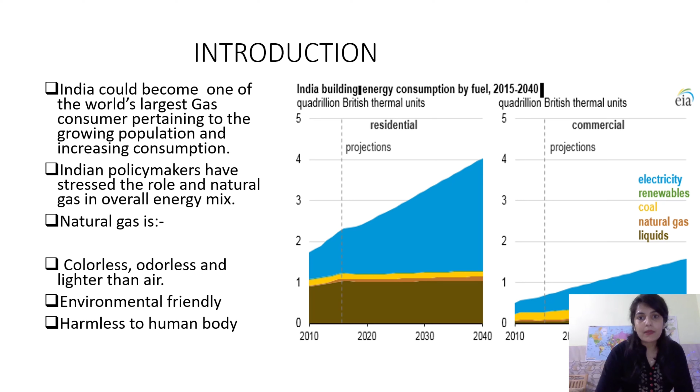As I already told you in the introduction, India is going to become one of the largest consumers of gas in coming time, due to its increasing population and increasing consumption. So India's policy makers are stressing on the role of natural gas in the overall energy mix. This pipeline is considered to be the most economical form of transportation, so that's why many pipeline projects are in the pipeline.

So let us calculate the demand. Let me use the marker first so that I can highlight. So the calculation of actual demand: how we'll calculate the demand is by calculating the domestic sector, the transportation sector, and the industrial requirement.

The area is Rishikesh, so we'll consider all the nearby areas like Rishikesh, Chamoli and Pauri Garhwal. The transportation sector will include buses, autos and cars, and any other requirement by the state government of Uttaranchal. So this is how I have done it.

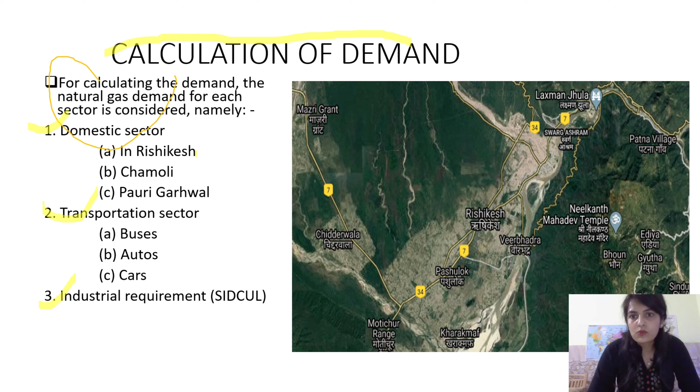So, procedure for calculating the demand: we'll take the population of Rishikesh city first, it is around 1,03,138. Population of Chamoli city is around 3,91,605, and Pauri Garhwal is around 6,87,000.

We will add all these populations and it will come around 11,81,000. Number of households, we are assuming an average 6-member family. Each house will use LPG, consuming 1.5 cylinders per month, that is in 2 months they will consume 3 LPG cylinders. This is the average requirement we have taken till now.

The standard weight of an LPG cylinder is around 14.2 kg, and I have written the calorific value of natural gas and LPG also, which will be used later in the calculations. So amount of LPG consumed in each household is 14.2 into 1.5.

That is in terms of LPG cylinders used right now, and if we are calculating for per day, we'll divide it by 30. So it is around 0.71 kg per day. This is LPG.

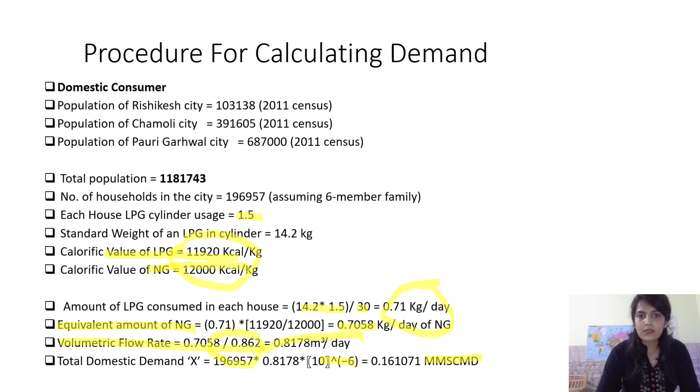Now, we have seen many calculations written in the form of MMSCMD, because there is a very large amount of natural gas which will be required in the whole region. So the calculations are done in million standard cubic meters per day. In order to convert into MMSCMD, I have multiplied it by 10 to the power minus 6. So till now I think everything is clear. Coming to the next slide.

Procedure for calculating the demand is P equals P naught into e to the power R T, where P is the current value of the population which we have added in the area in the previous slides, P naught is the initial value of population, R is the growth factor, and T is the time. That is the normal exponential equation.

We are doing it in order to project the demand for the coming years, for making the graph which I have shown you in the previous slide. So total gas demand in MMSCMD, Q standard, is domestic PNG plus CNG plus industrial, as we are making it for the whole region. These are the things which we have taken, and these are the estimations for domestic PNG.

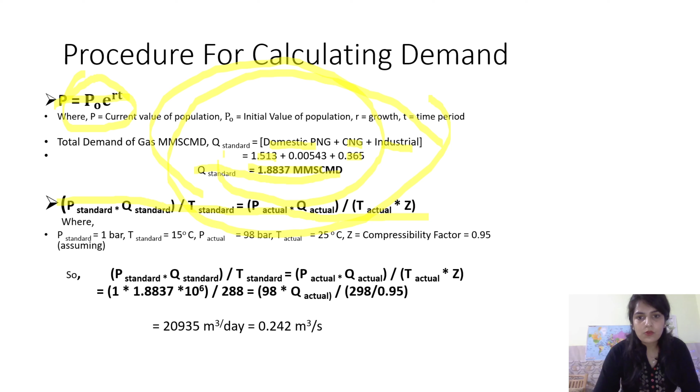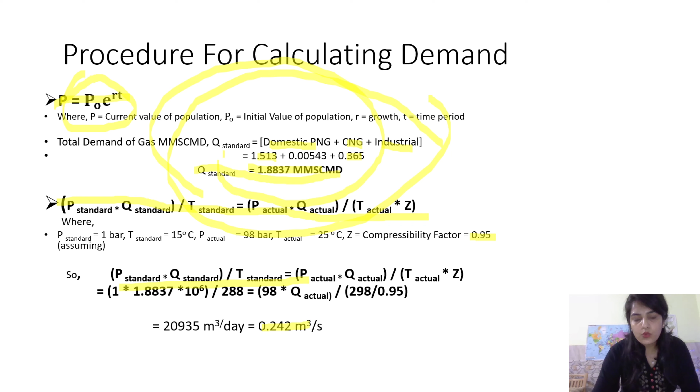Taking compressibility factor as 0.95, as per this equation, after calculating everything and substituting the values, we will get around 0.242 meter cube per second.

Now coming to the design calculation, we will be designing as per the requirement and the load of that pipe. As per the design, we are required to design steel pipe for high CGD, high pressure network, MDPE pipe for medium pressure, and copper and galvanized iron pipe for very low pressure or low pressure network.

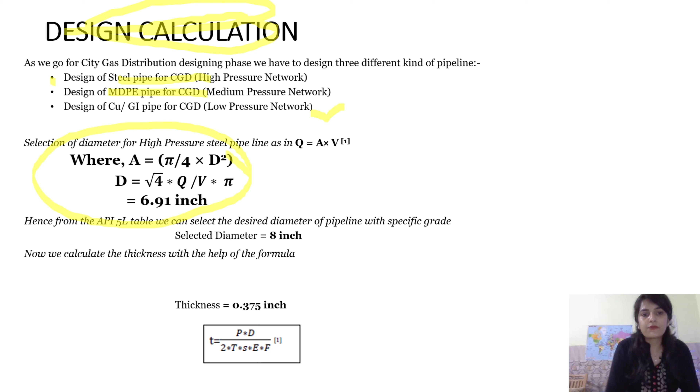Now if we are calculating the diameter of pipe, it's a very easy method, like in the previous classes or in class 12th we used to do. A equals pi d square upon 4. With this we can calculate the diameter, and from the table in API 5L, we can decide the diameter of the pipe as per the diameter and pressure.

So the thickness of that pipe is 0.375 inch. The thickness formula is given by this term. You just need to see the table in which the thickness is mentioned.

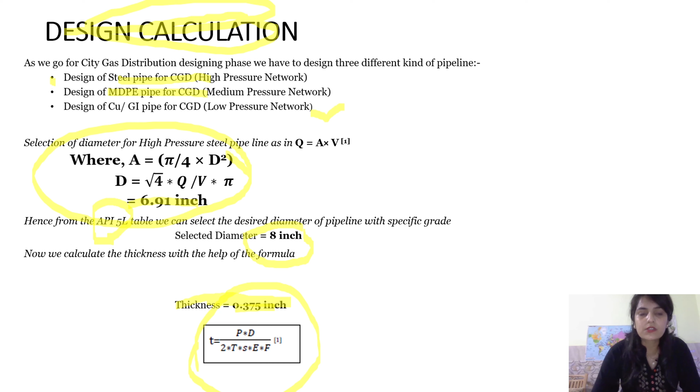Now coming to the cost of the project, there are three big costs associated with it. First is the pipeline network, that is plumbing, compressor station, liquid separator, metering station, valves and SCADA. Another is power source, how much amount of power is used, electricity or human resources or any other thing.

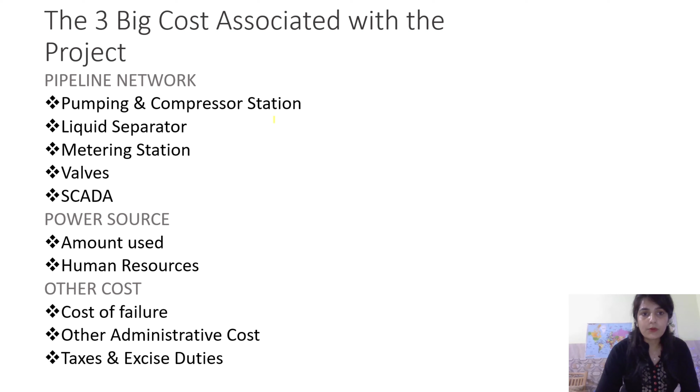And another is we are adding some buffer cost like cost of failure or any other administrative cost or taxes by government and excise duties. These are some of the costs I have taken into consideration while designing this project.

The operating standard cost which we take is around 10% of the total capex. If we are adding 10% to 113 crore, it will be around 12 crore approximately. So the total cost will lie around 125 crore in total.